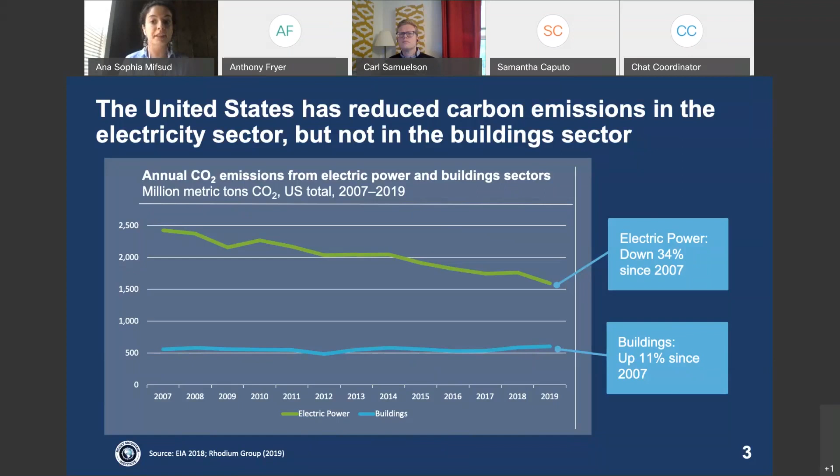But unfortunately, the building sector, which is just the direct combustion of fossil fuels in our buildings, accounts for 10% of all US carbon emissions. Those emissions are not going down - in fact, they're increasing over time as more people are connected to our gas infrastructure. So lots of cities and states that have made climate commitments are turning to building electrification through the use of heat pumps as a way to reduce these emissions.

I know many of you are even bigger experts on the topic than I am, but I'll mention what I mean by building electrification. When I say building electrification, I usually use that interchangeably with the deployment of efficient modern electric heat pumps. This technology has improved a lot over time. Modern heat pumps use a small amount of electricity to move heat rather than generate heat - this is different and more efficient than traditional electric resistance heating.

Because of the way it moves heat, this technology can often deliver 2 to 4 times more heating energy than the amount of electricity it consumes. This is true even in cold climates. The heat pump you see here belongs to my colleague who is based out of Colorado and experiences lots of snow. Because of the efficiency of this technology, even if you have an electrical grid that runs on gas, a heat pump is still more efficient compared to a gas furnace or boiler. And of course, not all grids in the United States run on renewables and natural gas.

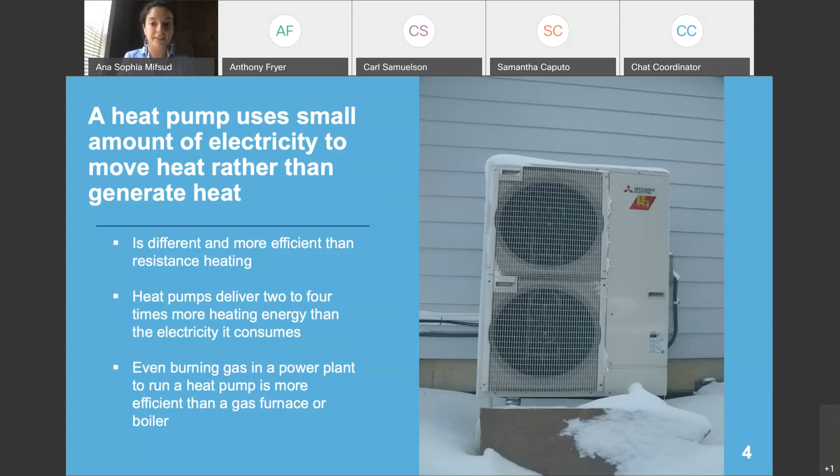So our team recently looked at whether heat pumps are emission savings opportunities throughout the United States. What we found was that over the lifetime of a heat pump, approximately 15 years, 99% of American households will save emissions compared to the gas alternatives. This analysis, which I've linked to - and I'll note I've included lots of links for further reading in the presentation, so we won't have time to go through everything, but I encourage you to dig into these details if you're interested.

What we found is that only in the 2 most heavily reliant states on coal, Wyoming and Utah - other than those 2 states, it is best for us to increase and accelerate the deployment of heat pumps because they are an emission savings opportunity compared to gas. And when compared to fuel oil, there's no question about whether heat pumps are a cleaner source of heat.

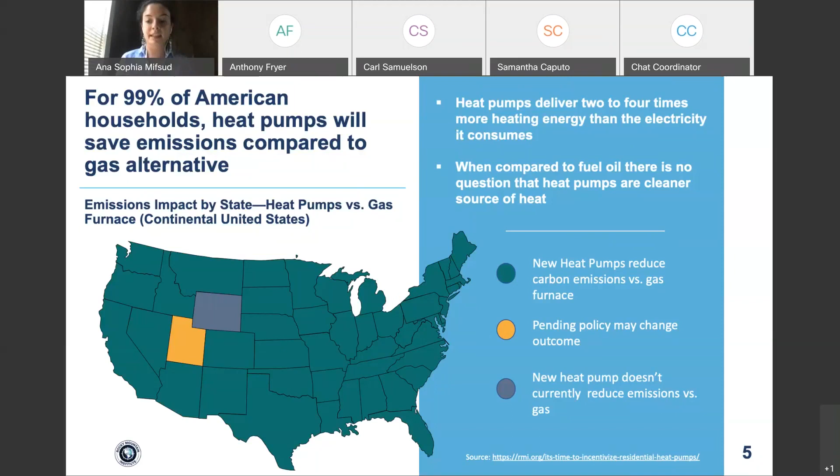Some of you are probably wondering why I'm focusing so much on heat pumps and why cities and states are focusing so much on heat pumps when thinking about building decarbonization. Efficiency, as you know, has been a key pillar to driving down these emissions, but an emerging space that lots of stakeholders talk about is renewable natural gas.

I have renewable natural gas in quotes, not in an attempt to be facetious, but rather because this term often is used to refer to several things. So when I'm talking about renewable natural gas, I'm referring to 2 things: biogas, which is primarily produced from organic sources, and synthetic gas, which uses renewable electricity to synthetically produce methane or hydrogen. Now, there are 2 problems with renewable natural gas that make it not a viable alternative to decarbonize the building sector.

The first is that even in the most optimistic analysis, these resources meet at most 12% of U.S. gas demand by 2040 in the most optimistic scenario, and other analyses put that number closer to 7%.

So there's simply not enough. And the other big problem is that it's very expensive. Biogas gets more expensive over time, or the more you use it. And synthetic gas is expected to be 8 to 17 times more expensive than fossil fuel gas.

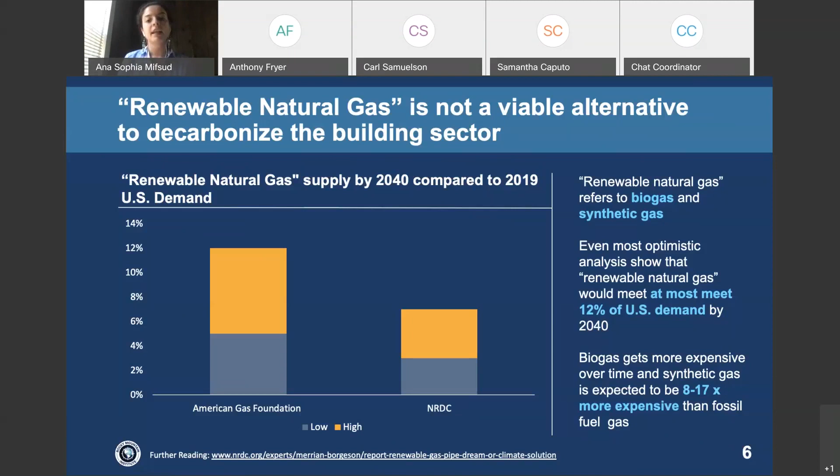So as a result, many cities and states are focused on the space of building electrification through the deployment of heat pumps. And often the first thing that they do is set some goal or commitment for their jurisdiction. And there are one of three ways typically that these jurisdictions will do that. The first will be to frame it within their larger emissions goals, like the city of Ann Arbor. They have recently set a goal to decarbonize the city by 100% by 2050. And within that plan, they have specific goals for building electrification.

There are some cities like Denver, Colorado, that are taking a broader approach and are instead requiring fossil fuel reduction, as opposed to specifically calling out building electrification. And then there are some states like New York and Maine that are very explicit about their desire to promote heat pumps. Maine, for example, has recently made a commitment to deploy 100,000 heat pumps by 2025. And if they do it, will be one of the leading states in heat pump deployment.

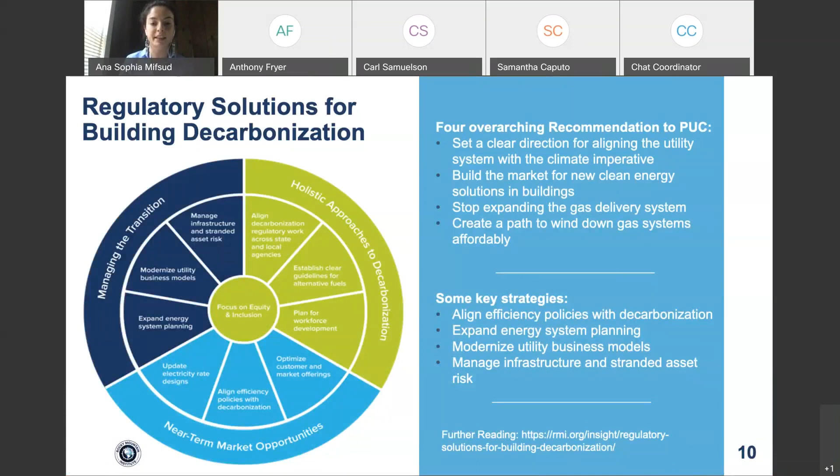So we're seeing big increases in heat pump deployment, but we're seeing this mostly done through efficiency measures. So they're pairing heat pump programs with weatherization, or are doing it as a way to transition from electric resistance heating to more efficient heating, or are using it as a way to try to address their state's growing air conditioning loads. Many of these programs target delivered fuels, are mostly residential, and target midstream incentives.

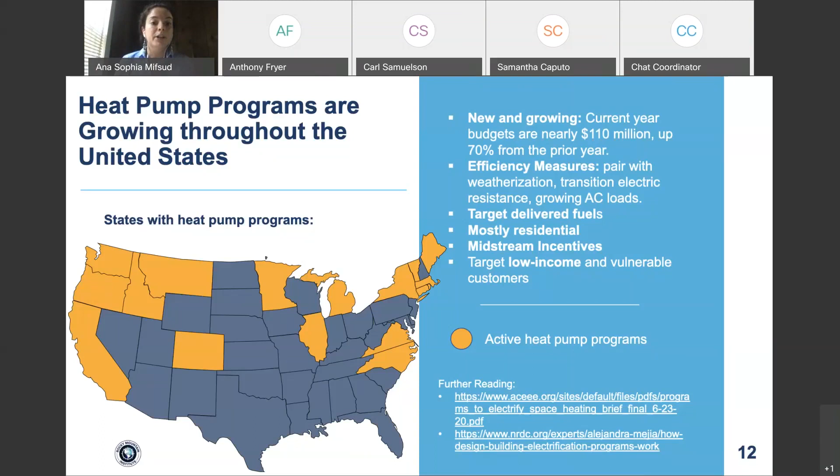Notably, many of these programs also have specific carve-outs for low-income and vulnerable customers in order to ensure that they are also benefiting from these programs. And these programs will be really important, not only in helping drive down the cost of heat pumps, but also in stimulating the supporting ecosystem for this technology.

On the topic of cost, I'll just highlight that we have done quite a bit of analysis on the economics of electrifying buildings and published one of the first reports on the topic a couple of years ago, and are looking to update this report and include more cities, including some in Minnesota, at the end of this year.

But generally what we see, exclusively when you think about economic cost and not talking about health and emission cost, is that new construction is often cheaper to do all-electric buildings from the start rather than fossil fuels or gas. And the reason you see those lower costs is because you avoid the cost of gas infrastructure, and you avoid having to pay for two separate systems, one for heating and one for cooling.

You also see cost savings when comparing retrofits from electric resistance and delivered fuels towards heat pump technology. And when thinking about gas retrofits to heat pumps, sometimes those can be cost effective if there's a way to avoid gas infrastructure cost. And this, of course, goes without saying, but there are real health and emissions costs involved in continuing to evolve the fossil fuel infrastructure.

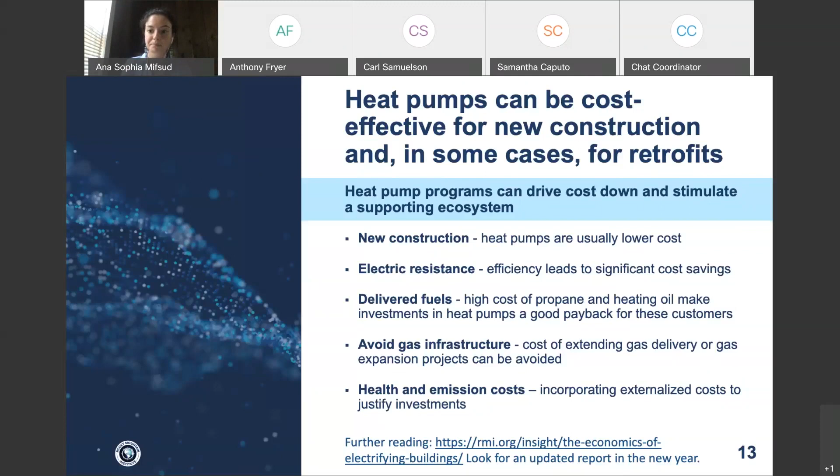So lastly, I'll wrap up talking briefly about some areas of increasing interest on the topic of building electrification. The first of those is around heat pumps in cold climates, which I know is an especially important issue in Minnesota, so I'll spend a little bit of time on it. I'll start by saying that heat pump technology has improved significantly over the last couple of years. And modern heat pumps can work even in below freezing temperatures. And we expect that this technology will continue to improve and continue to be able to provide affordable and reliable heat in more and more extreme climates.

What we've seen across the country is that in some retrofit programs, installers are leaving existing fossil fuel infrastructure to be used as backup heating, and in other places, they're relying on electric resistance, such as a ducted resistance backup, as a way to meet any deltas between what the heat pump can provide and the heating needs of the home.

Some people bring up the concern over winter peaking, and I think this is, from an engineer's perspective, a very interesting issue. In a highly electrified future, this could be a problem in some areas, especially in cold climates. But this really won't be a problem until there is a very high penetration of heat pump deployment in a particular area. Some key mitigating strategies when this does begin to become a problem are weatherization and demand response programs.

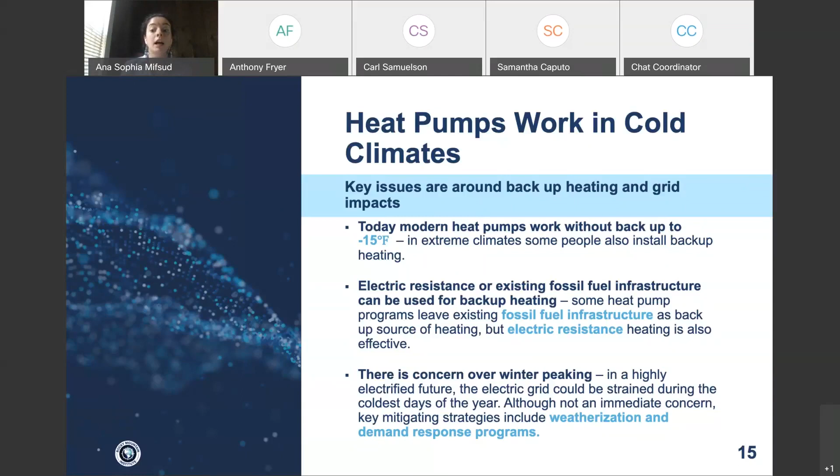Another area where we're seeing a lot of focus and attention is on the health impacts of burning fossil fuels in buildings. Unsurprisingly, burning fossil fuels in buildings has health impacts. And something surprising, at least for me, when I started thinking about this issue, is that this is especially a problem in indoor air quality because indoor air is currently unregulated in the United States. And even before the pandemic, we spend up to 90% of our time indoors, which means that we are spending most of our time in unregulated air quality.

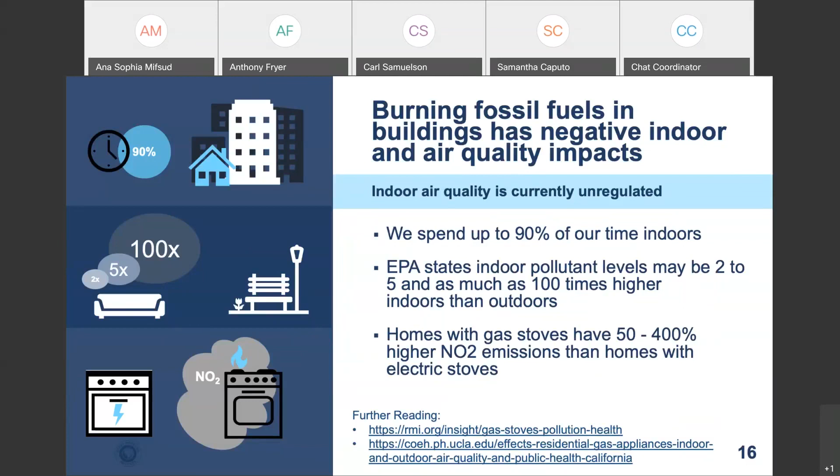The EPA states that these indoor pollutants may be 2 to 5, sometimes as much as 100 times higher indoors than outdoors. So that means that you have levels of pollution inside your home that would be illegal outside your home. And we see sources, especially gas stoves, as a major contributor to these indoor pollutants. A gas stove, as we recently published in a report, which I've linked here in this slide, can sometimes lead to 50 to 400% higher levels of NO2, which is a key trigger for asthma, in homes with gas stoves when compared to electric stoves. So this is an area where we're seeing a lot of interest, and where regulators throughout the country are thinking about how to use health funding in order to support the electrification of some buildings.

And last and very importantly, when thinking about building electrification, there are some serious equitable transition considerations that must be taken into account. I'll highlight two. The first is workforce transition, and the second is ensuring that low-income customers are protected. So of course, and this is a very real issue, there is a workforce that currently depends on selling fossil fuels, and the estimates are that transitioning to a low carbon future will create lots of high quality jobs, but we still need cities and states to create these workforce training programs to allow for that.

There also is a concern that low-income customers that can't immediately afford this transition will be burdened by the fixed costs of the system as wealthier customers defect. What we've seen a lot of states do to try to address this is to prioritize the transition of these low-income customers first in the transition to all-electric buildings. So these are real concerns, and people are actively working to address them.

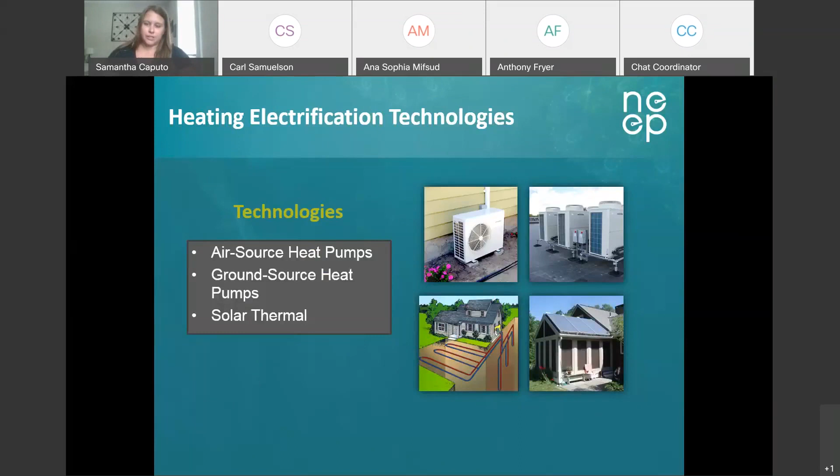Usually focusing on air source heat pumps, ground source heat pumps, and also solar thermal technology. When looking to push for strategic electrification, there are a lot of different policies and programs that come into play. I'll touch on examples across a few states in the Northeast, but I wanted to highlight one resource that may be helpful for Minnesota as you're working on this report, and that is NEEP's Building Decarbonization Public Policy Framework.

What this does is look at a lot of the key policy areas that need to either advance or change to ensure decarbonization. So looking at things that already exist, such as building codes and standards, and how do we drive those existing codes towards either zero carbon or all electric? How do we take utility programs and push for electrification within that realm? So it's pretty high level, touching upon all the types of policies that interact with buildings and providing that framework of how to move it forward. That is available for you all to take a look at as well.

So diving right into it, I wanted to provide a few examples of different policies and also things on the regulatory level in the states in the Northeast. I'll preface this that some states are more active than others in the region. I don't have something for every state, but there are some clear leaders in the space, such as New York and Massachusetts. So you'll hear about those two states.

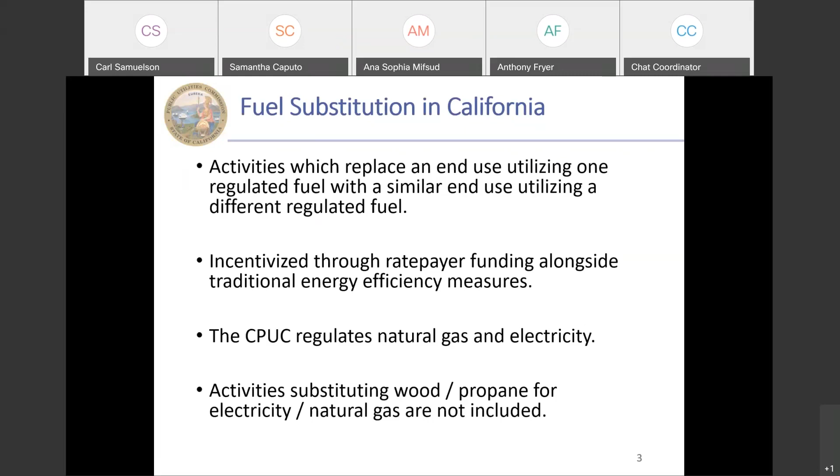So the 2019 fuel substitution decision was notable because there was a general perception among stakeholders that fuel substitution activities are important to California's energy efficiency goals and energy goals generally. To set the stage a little bit for why fuel substitution matters in California and why we underwent the very challenging process of bringing stakeholders together and allowing it in our portfolio, I've pulled together 4 key facts.

Firstly, approximately 25% of the GHG emissions come from buildings in California. Obviously, sectors like transportation play a huge role in GHG emissions and reducing them, but a good chunk of emissions are still associated with our buildings. This leads to the second fact, which is that California has a vested interest in decarbonizing the building sector. AB 3232 required an assessment of how to reduce carbon in the building sector to 40% below 1990 levels.

And then thirdly, a study from UC Berkeley, and other similar studies have been conducted as well, found that 90% of the water heaters in California currently utilize natural gas.

So one way we could choose to achieve our building decarbonization goals would be to focus on replacing those older natural gas water heaters with more efficient gas water heaters. But in California, the electric grid is far less GHG intensive than our gas grid. So replacing them instead with electric alternatives could be a good option for achieving our goals.

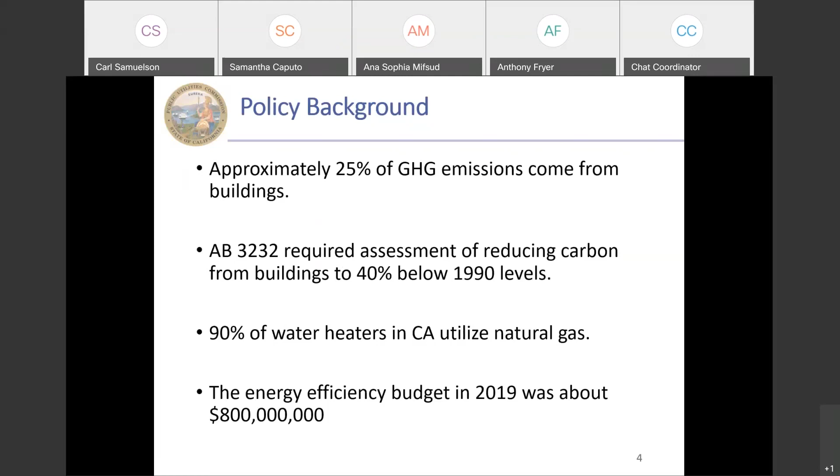So to give a quick background on the decision and the policies that went into making it, the Commission developed policies on fuel substitution as early as 1990. This was obviously a big step at the time. This decision was created at a time where our electric grid was more carbon intensive and energy efficiency programs were still maturing. The bulk of the stakeholders were very concerned about the possibility of fuel wars between electric and gas only utilities. And when I say fuel war, I mean there was concerns about utilities predatorily seeking to increase load of the fuel they offer rather than undertaking fuel substitution programs in the spirit of reducing energy consumption generally.

The original fuel substitution decision established the three-prong test, which technically allowed fuel substitution activities, but as I said before, the requirements were so strict that practically none were incentivized. As time passed and our electrical grid became more efficient, solar generation increased and the energy efficiency market kind of sucked up all of the low-hanging fruit like lighting. The state passed goals related to GHG reductions, and stakeholders began to see electrification as a primary tool for achieving our state goals. Finally, the NRDC, Sierra Club, and CEDMC filed a motion with the CPUC to review the three-prong test in 2017. Between 2017 and 2019, the judges sought comments on the motion.

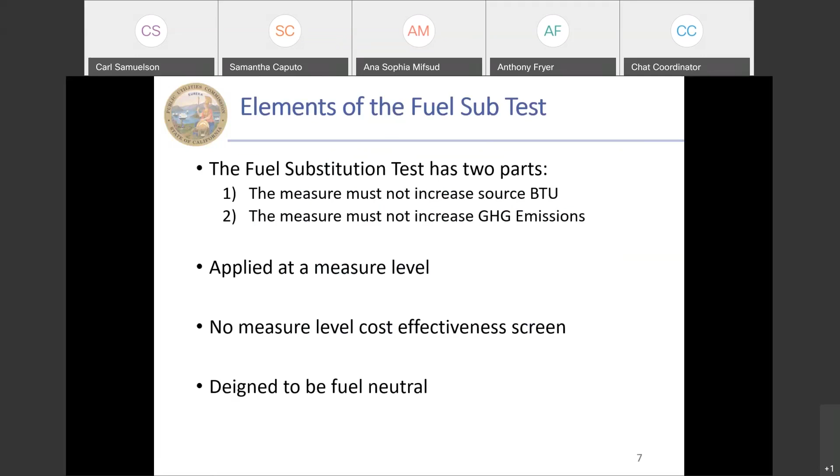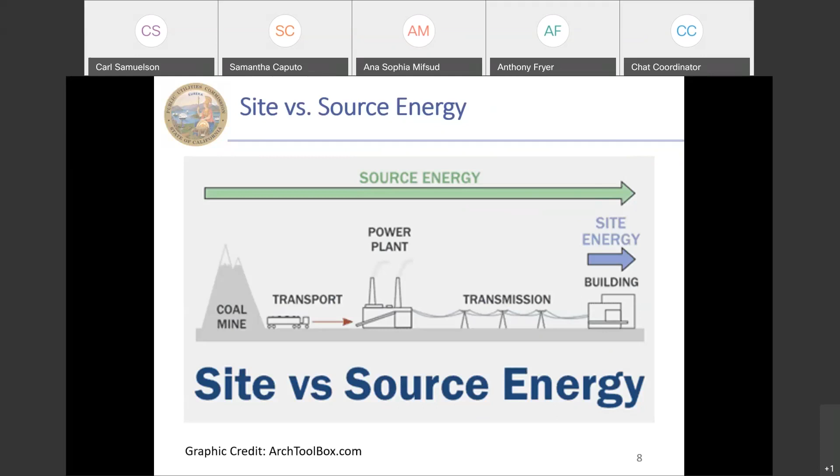In California, practically all of our electricity is generated through natural gas powered turbines or through renewables. So our source energy calculations start at the power plant phase, but for states still using coal for electric production, their source energy calculations would begin at the coal mine. It's important, when considering fuel substitution policies, to consider what that source energy calculation is compared to the site energy.

So in terms of actually passing the test, I'm going to discuss the process for demonstrating the measures passed. We developed an Excel-based tool to help the program administrators with these calculations, but I'll run through them conceptually here. The program administrators essentially provide a copy of the calculator results when they're asking the CPUC to approve inclusion in our portfolio.

As I mentioned before, part 1 of the test states that the measures must not increase source energy. That means that the life cycle source energy of a measure must be lower than the life cycle source energy of the baseline technology. This calculation is done in our fuel substitution calculator.

Essentially, the steps are that you convert the site energy savings to source energy savings using intensity factors that we developed for this effort. You repeat that process for all of the years in the measure's expected useful life and then sum it. If the BTU results are positive, that indicates that there are savings.

Interestingly, the second part of the test has a very similar calculation. As I mentioned before, California's non-renewable electric generation is done pretty much entirely with gas. Because of this, after we finished developing the process, we determined that the energy intensity factors are essentially the same for part 1 and part 2, even though the results are expressed a little bit differently.

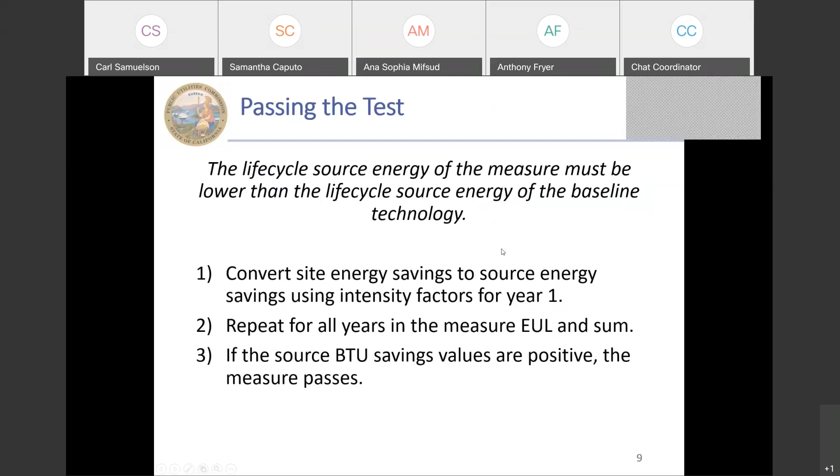To calculate the source energy, we subtract the measure site energy electric consumption from the baseline site electric energy consumption for the first year. We multiply that value by the yearly energy intensity factors that are developed for this process, which I'll show you on the next slide. We perform that calculation for every year of the measure's expected useful life.

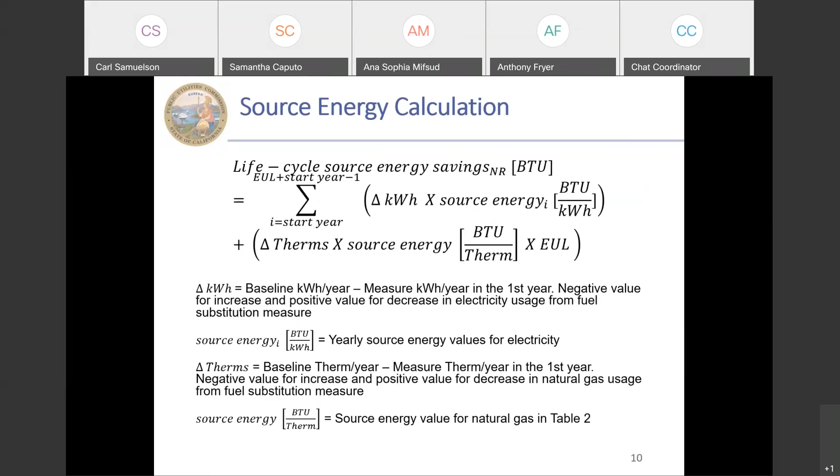Since the gas portion of the equation uses relatively constant energy intensity values, we add the gas portion separately. So we subtract the measure gas usage from the baseline gas usage, multiply that value by the source energy value for the natural gas, which is constant, and then multiply that value by the measure's expected useful life. If the overall result of this equation is positive, the measure achieved source energy savings and passes part 1 of our test.

So in terms of some challenges and lessons learned from this, I think most stakeholders would agree that this was a very challenging process. It was challenging in the decision development and in implementation. It was much more controversial than traditional energy efficiency activities, as I'm sure many stakeholders on this call are familiar with. One pain point with this process was deciding what type of measures should be incentivized and under what conditions.

We received some feedback that stakeholders were interested in engaging in activities which switch from propane and wood, but since the CPUC doesn't regulate propane and wood, we ultimately decided that we weren't able to incentivize these programs.

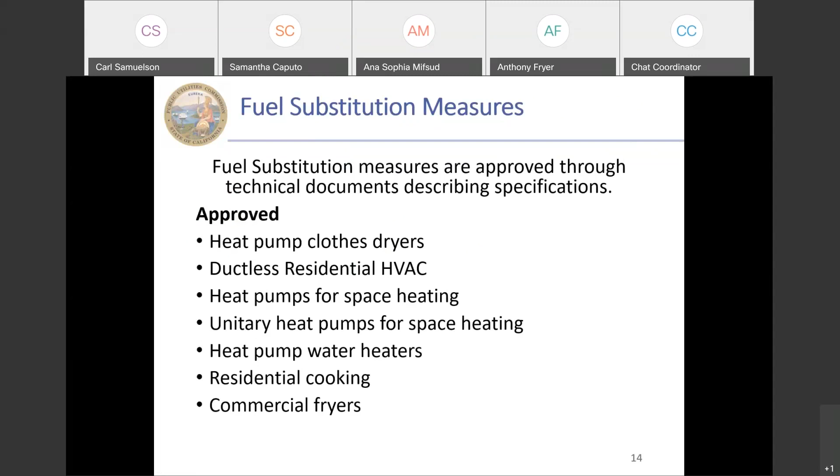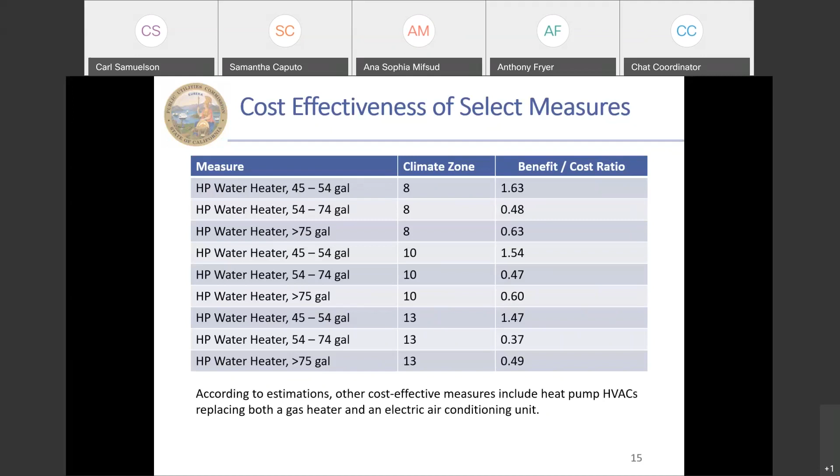For the small sized water heater in climate zone 8, which is the Central Valley, there's a cost benefit ratio of 1.63. If you look at that same unit in climate zone 13, which is Southern California and the inland area, it falls to 1.47. That's still a pretty good TRC. But if you go to the larger, medium size heat pump, you see it has a really detrimental impact on cost effectiveness. In climate zone 8, the mid-sized heat pump has a benefit cost ratio of only 0.48. This demonstrates that the types of inputs you use in the cost effectiveness calculations can have a really big impact on the cost benefit ratios.

As I mentioned before, the cost effectiveness of measures varies greatly by climate zone. This was one of our major findings. Heat pumps do not perform as well in cold climates, and that's definitely reflected in our cost effectiveness calculations. That's not to say they're not offered in the colder parts of California, but we do see a need for some program design when offering heat pumps and other fuel substitution technologies in a state with a pretty big range of climates, though obviously it doesn't get to be negative 16 here in California in any part for the most part.

In California, program administrators have the option to exclude or include upgrade costs such as electric panel upgrades. If those costs are included, the measures obviously tend to be much less cost effective. In the examples I showed you previously, that was not including any infrastructure upgrades like the necessity of panels, or even things like installing the heat pump in a space not designed for it.

That was another finding. Other equipment specifications like the baselines, the energy ratings, and the water heater size also greatly impact cost effectiveness results. The reason I highlight this is for program administrators looking to include these types of technologies, I think it's important to try different variations, because something that seems like it won't be cost effective in one area using one specification might actually be cost effective in other areas with slightly different specifications.